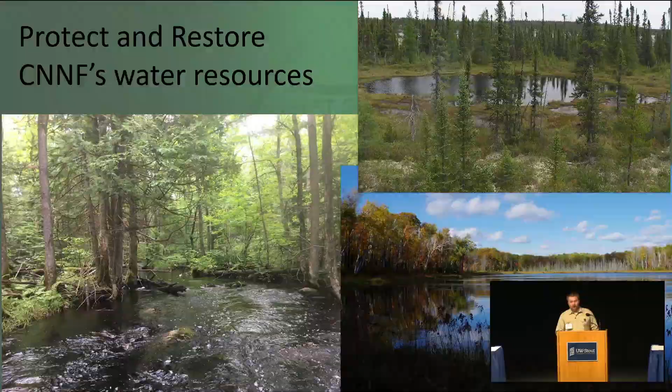But I always feel like I'm coming home when I come to the Red Cedar watershed. I grew up in Rice Lake, Wisconsin. I had a family cabin up here on Long Lake in the very headwaters up in Sawyer County. My first job was working for the Red Cedar Lake Association, pulling out curlyleaf pondweed, trying to keep Eurasian water milfoil out of there. Great job. And still to this day, any guesses where this fourth picture was taken based on the hue of the lake?

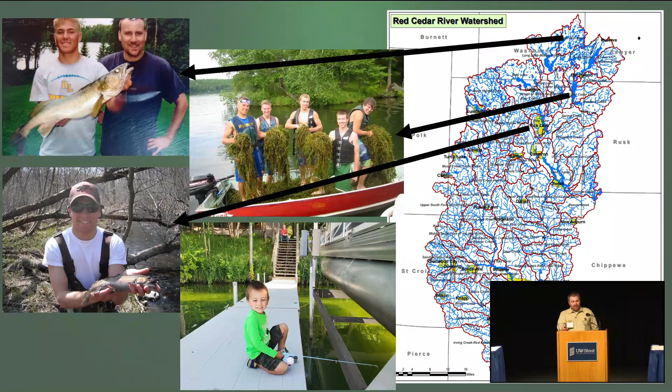One of my favorite lakes in the world, Tainter Lake. This is where my grandparents live. Have so many amazing memories going to visit them. They still live there to this day. That's actually my son on a picture that we took last summer off my grandpa's dock right in the northwest corner of Tainter Lake. So I love the Red Cedar watershed. Grew up here. My professional experience has taken me elsewhere, but I'm glad to come here and share some of my experiences.

So here's my outline for today. We're going to go over the role of forestry in phosphorus processes just a little bit. We're going to look at some of the ways that forest land management can impact water quality. And then really I'll be spending the majority of my time just really sharing some of our lessons learned on the National Forest and how we have reduced erosion and runoff over the past few years.

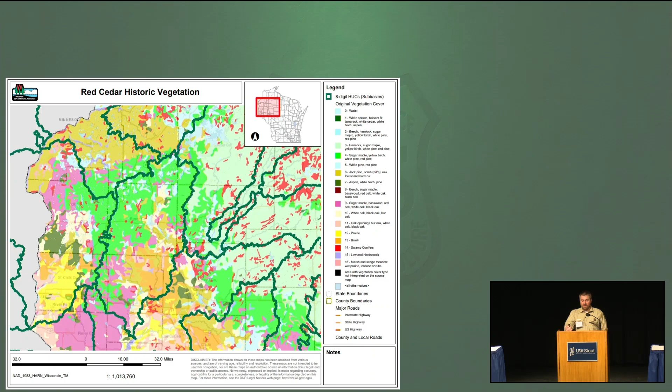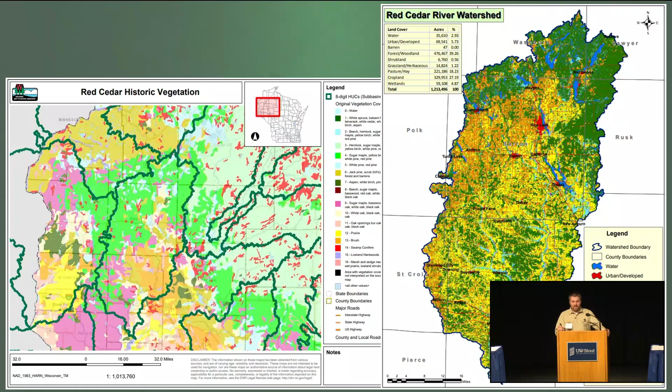So just a little bit on forestry and phosphorus. I was struck by looking at the historic vegetation of the Red Cedar watershed. They say about 75% of the watershed used to be forested. It's kind of those, on that map, the areas that are green and pink colored. And you compare that with today, and today about 40% of the watershed is forested, and the forests are kind of pushed up to the north and to the northeast in Rusk, Sawyer, and Washburn County up in the headwaters.

And just in case you're new to the Red Cedar watershed, our dominating water quality problem is an excess amount of phosphorus from our croplands and our pasture lands, but all other sources as well, that ultimately causes excessive algal blooms. This is a picture I took right from my grandparents' pontoon. I believe it was last summer on Lake Tainter.

They've done some incredible detailed study here in the Red Cedar watershed of where our phosphorus is coming from. They found about 66% of the phosphorus comes from cropland, yet cropland comprises only about 28% of the land area in the watershed. They've also determined that forest lands contribute about 10% of the watershed's phosphorus, but forest lands comprise 40% of the land area.

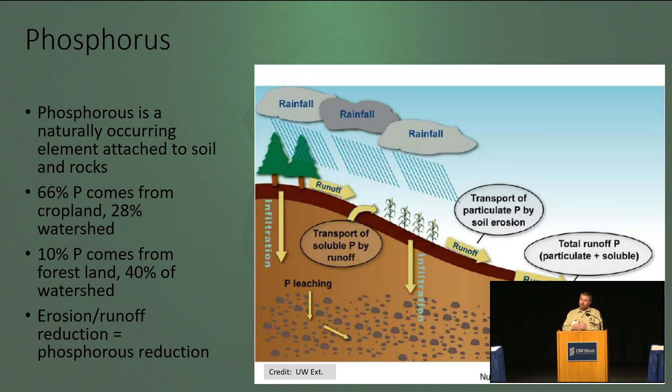The key with phosphorus, I think, is that it makes its processes fairly simple to understand. If we slow down erosion and runoff, we slow down input of phosphorus. It's really about that simple, though a lot harder to implement in a watershed as large and diverse as the Red Cedar. But at least the base processes we can understand.

As far as a tie to phosphorus, here's my take-home before we jump into forestry: all landowners in a watershed as big and diverse as the Red Cedar do have a part to play. Forestry can discharge sediments and phosphorus to waterways, so I think even us forest landowners have a part to play.

So what can forest landowners do about it? It's all about reducing erosion and runoff to lower phosphorus levels. I'd like to state this a little more positively, though. Forest landowners, not only in the Red Cedar but across the whole state of Wisconsin, have a tremendous opportunity to contribute clear, cool, naturally timed flows to the headwaters of our systems.

If you look at that map on the right, the darker green areas are our forests in Wisconsin, and the dark green lines are our major watershed boundaries. What do you see? Starting from the east: the Menominee Basin, the Fox River Basin, the Wisconsin River Basin, the Chippewa Basin where we are now, all the way to the St. Croix and the Namekagon, and up to the tributaries that flow into Lake Superior.

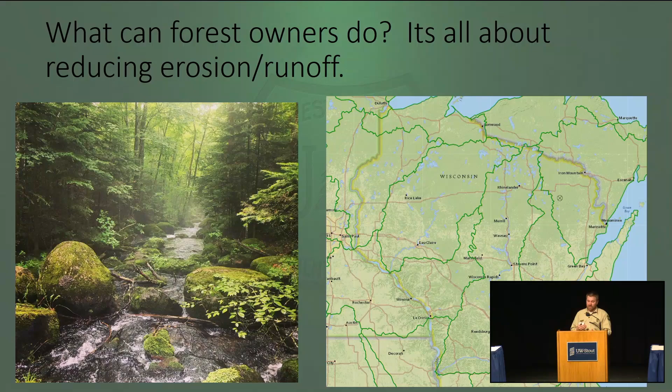All of our major watersheds in the state of Wisconsin originate in forest land. So forest lands are our headwaters, and I would say it's a tremendous opportunity that forest landowners have to steward this resource.

So how can forest land impact water quality? I have five main areas, and all of these I've observed on the National Forest. First and foremost, roads. By far the number one most impactful aspect of forest land management on water quality is roads. Unfortunately, forest management requires extensive road networks simply to facilitate moving logs and transporting them to mills. Research done by my agency across the nation has shown that roaded watersheds contribute anywhere between 3 and 700 times more sediment to surface waters than non-roaded watersheds.

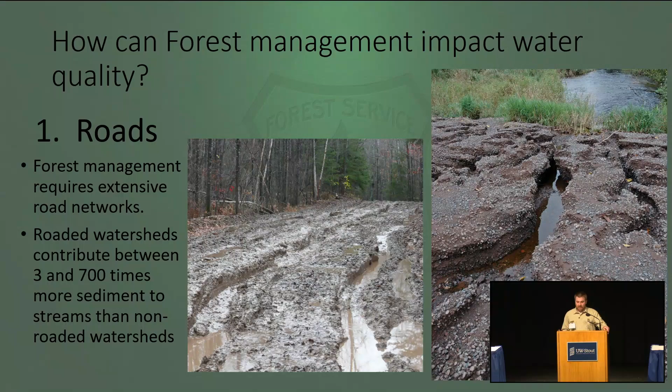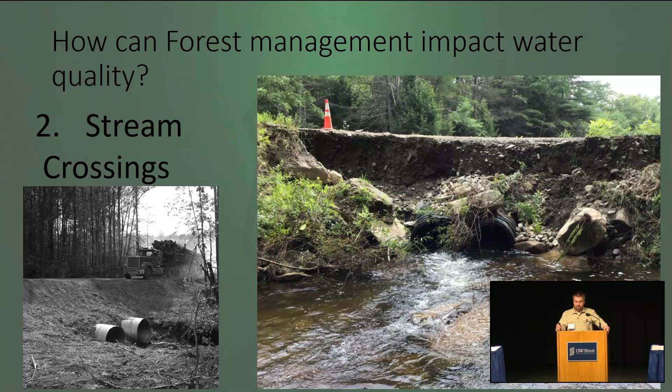That's simply—I'll show you the exact processes in a bit. Certainly all of our watersheds here in Wisconsin are roaded, and so are contributing naturally more sediment than they would have. Roads are especially impactful to water quality where they cross streams, simply due to proximity—the road is built right down in the stream. We'll be coming back to this topic in great detail in just a little bit.

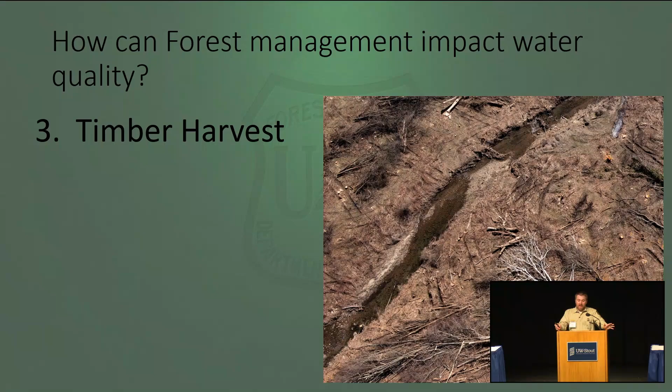Also, simply the act of harvesting trees close to water bodies can impact waterways. This is fairly logical, mainly in the form of reduction of shade and increase of surface water temperatures. Site preparation activities—this is what happens after areas are cut over and they're preparing the ground for replanting, forestry's version of tilling. This can also lead, if not done with significant buffers between these areas and water bodies, to short-term increases in runoff and erosion.

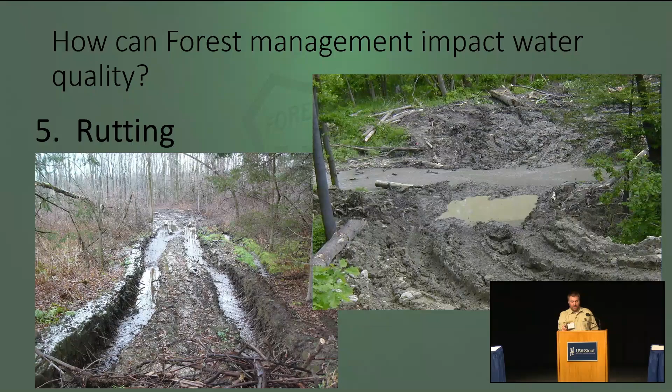And then simply the fact that we're driving large, heavy equipment on natural soils—rutting and compaction of native soils, if those soils aren't dry or frozen, can also put a lot of sediment into our waterways, especially like the picture on the right, if directly adjacent to a water body. And of course, it's worth saying that some of our biggest impactors to water quality in forested landscapes come from non-forestry related activities.

Certainly wetland modification, road building in wetlands, wetland draining, wetland filling, but also shoreline development, so we've got roads and new homes along shorelines. Dams—the state has a tremendous number of dams. Even on the National Forest, we have about 400 active dams.

And developed recreation, particularly motorized recreation trails—ATV trails, snowmobile trails. If they're not located, constructed, and maintained right, they can have tremendous impacts to water quality as well.

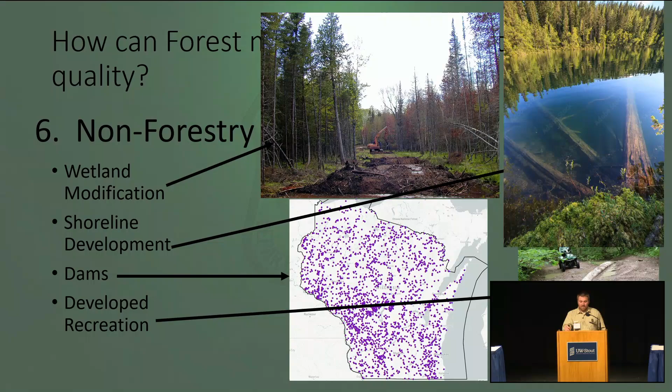Just a quick side note for anybody who owns property on shorelines: if you're clearing your shorelines, yanking trees out of the water, cutting them down before they can fall into the water, you're really robbing those lake ecosystems of vital habitat components. So if you're a shoreline owner, you have a tremendous opportunity to increase habitat value in the lake. Leave those trees in there and keep your shoreline as native as possible.

So now let's jump right into it, and this is the boots on the ground stuff. This is simply what we've learned in 30 years of watershed management on the Chequamegon-Nicolet National Forest. And we're going to start with our forestry best management practices for water quality.

Forestry best management practices for water quality—it's written in this wonderful little handbook. I have a pile of them up here on the front, and I hope I don't have to take any of those home, so please come up and grab one. It's a tremendous resource that's been developed for us in the state, developed by Wisconsin practitioners for Wisconsin practitioners.

But how did this come to be? This all started with the Clean Water Act of 1972, which among many things required that each state develop plans and procedures to control silviculturally—which just means forestry related—non-point sources of pollution to the extent feasible. So Wisconsin DNR, the Forestry Division, got together a great group of partners and experts, and they deliberated over many years and built the first edition in 1995 of Wisconsin Forestry Best Management Practices for Water Quality. It has one simple goal: to provide easy and cost-effective methods to responsibly manage forests and protect water quality. I think it does an excellent job of that.

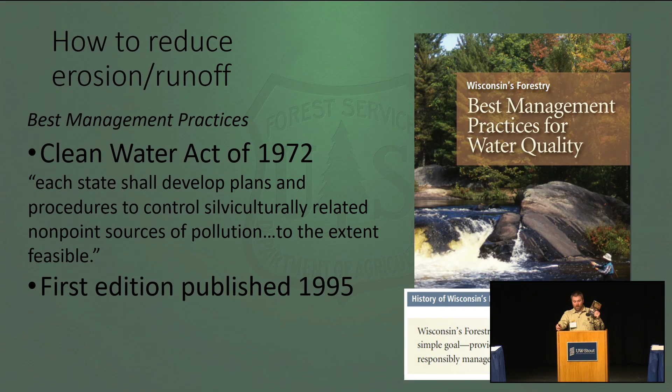I want to give you a brief overview of what's in this book and some of the lessons we've learned applying these things on the Chequamegon-Nicolet. It's a tremendous resource with many chapters, all worthwhile, but I'm going to focus mainly on 5 key chapters: timber sale planning, forest roads, stream crossings, timber harvesting, and riparian management zones, because they have the most actionable and practical BMPs that we need to know about.

Backing up a little, if anybody hasn't heard the term BMP before—Best Management Practice—this is simply the cutting edge on-the-ground techniques for either preventing an impact or improving something. So a best management practice, I'll just refer to them as a BMP.

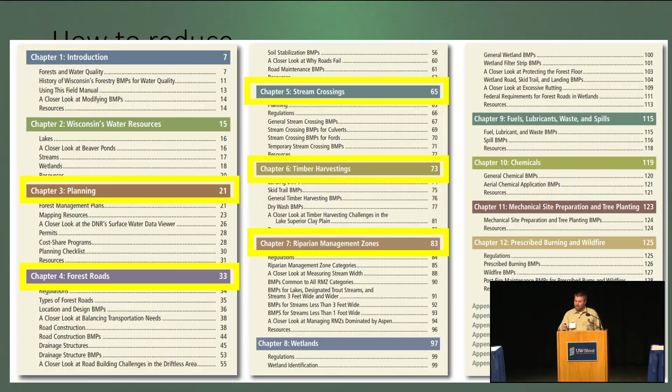All right, let's look at one slide on planning. This is chapter 3 in our book, and it's all about if we're going to be developing our land and logging our land, we simply need to have a logging plan. Here's an example of one that's been built by my forester colleagues on the Chequamegon-Nicolet. We do not put a timber sale out to bid without very thorough planning that has gone into that.

What we need to identify in our logging plans is our access routes, our water features—our wetlands, our streams, our dry washes, our lakes. We need to list all applicable BMPs and identify other sensitive areas, such as winter soils, which are just a heavier, wetter soil that needs to be operated on only in frozen conditions. There's lots of other logistical things that can go on a logging plan map, but those are the essentials.

So let's jump right into forest roads. This is the longest chapter in the book, and for good reason—we'll spend a decent bit of time here. The book says right at the outset, and I 100% agree, poorly located, constructed, and maintained forest roads are the largest contributor of non-point source pollution in forestry. Absolutely true. And notice the kind of pollution that roads contribute: sediment. And what comes with sediment? Phosphorus.

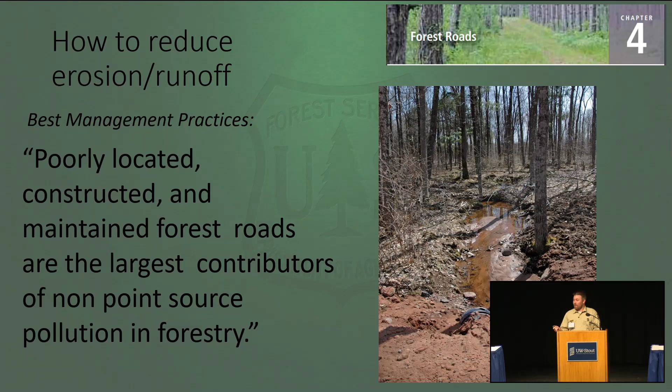The book first starts out with how do we locate roads, if we're in the fortunate opportunity to plan our properties from scratch, which we aren't always. Oftentimes we're stuck with the roads where they are. But if we can plan our properties and access routes, we want to minimize the water crossings.

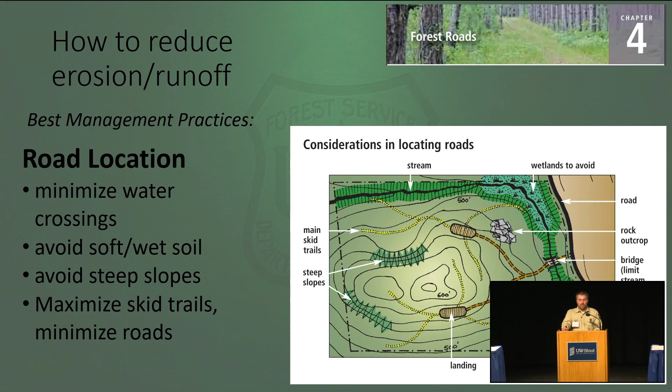We want to avoid wet soil and avoid steep slopes. One other key is we want to minimize the mileage of open, engineered, permanent, year-round haul roads, and maximize the mileage of what's called a skid trail. That's where big, low ground pressure tire equipment, logging machines, can traverse, as opposed to a large semi-log truck. So we want to maximize skid trails and minimize roads on our properties.

Next, we want to ensure that we use the appropriate type of road use designation for each type of road. This is also based on the level of engineering that's gone into the road, the surrounding soil conditions, and our needs for the property. I would say this is really key.

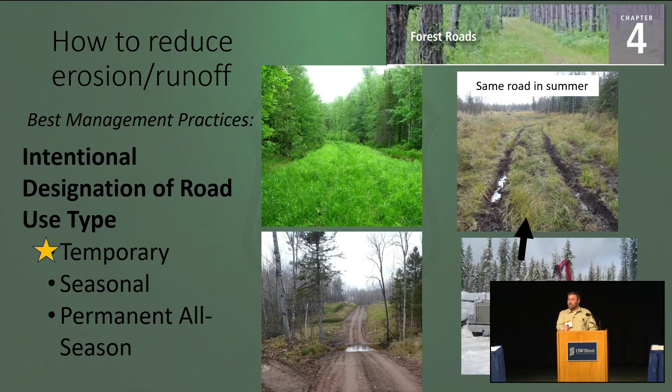One of the best ways we can reduce the amount of erosion and runoff from our properties is utilizing as many temporary roads as we possibly can. The vast majority of erosion and runoff on forest land comes from our open, permanent roads. Much less, as you can see from the top left photo, you'd expect on a temporary road that spends most of its time well vegetated. Also, temporary roads are cheaper to construct and maintain.

Now, in some areas with wetlands and other wetter, soft soils, the only way to access our lands for timber harvest activities is in frozen ground conditions. So it's really important that we designate our winter-only roads. The BMP here is that when we're done using them, we ensure we physically block them as best we can. This is mainly important for public landowners, because on public lands we have a variety of uses—hunters, ATVers—and we want to encourage those uses. But if we don't properly block our winter roads, these uses can cause tremendous damage.

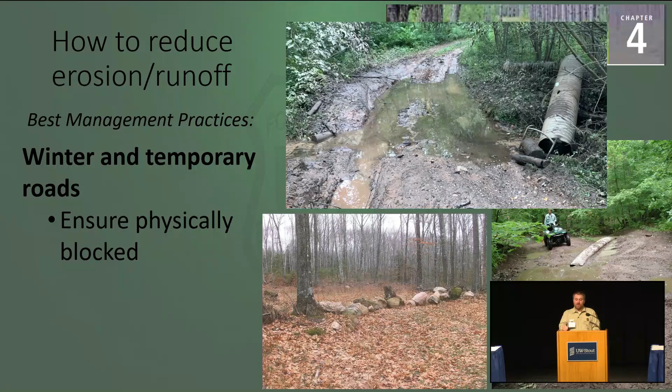Maintenance is also important for our roads, and really this comes down to making sure that whatever surface drainage template—crowned, insloped, outsloped—they were originally designed for gets maintained. You'd think that's pretty logical, but it's actually really hard to do, especially with big extensive road networks, like we have on the National Forest, where we need to maintain about 5,000 miles of open roads.

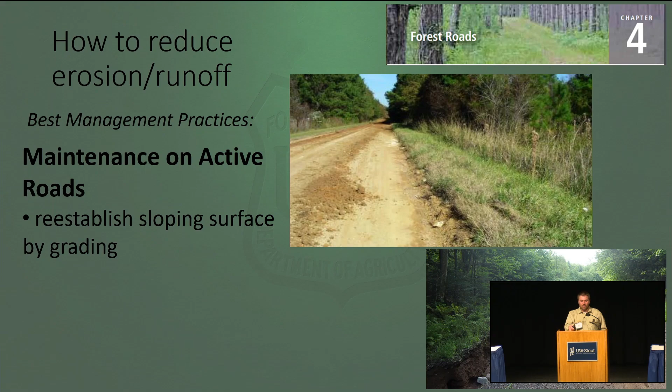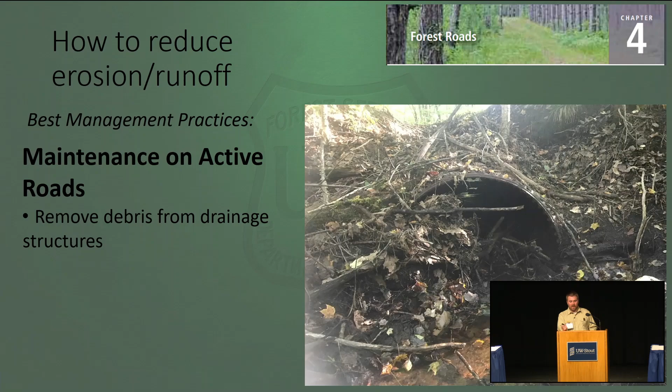Now, on our inactive roads, these are temporary roads and winter-only roads. Our maintenance is not recurring, like grading or unplugging drainage structures. It really happens only once, when we're done using the road and moving out of it to close it. So it's incredibly important that we remove our drainage structures, break ditch lines, and provide water bars, which are just big speed bumps on the surface to shed water off the road.

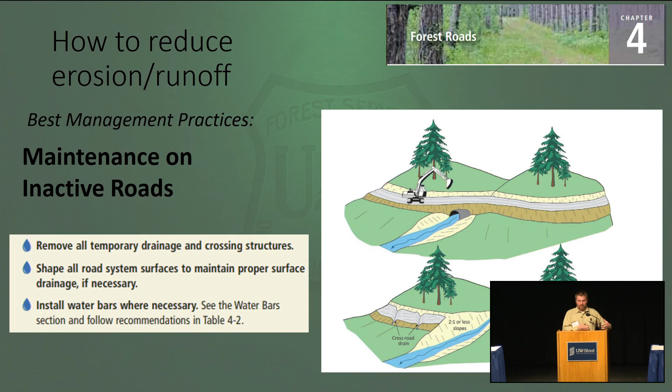And we break up the road surface and seed it. This is really important because if we're not going to be revisiting a road for a long time, those culverts will eventually plug and fail. This is probably our least attained BMP on the National Forest.

It just happened that in the past we were in a hurry to get out of a certain area. We were using a temporary road and left culverts in place. I probably have 400 pictures that look like this that I could share. We just did an inventory of all our culverts and stream crossings. This is a failed culvert that was left in a temporary road, and it discharged several hundred cubic yards of sediment into this little trout stream.

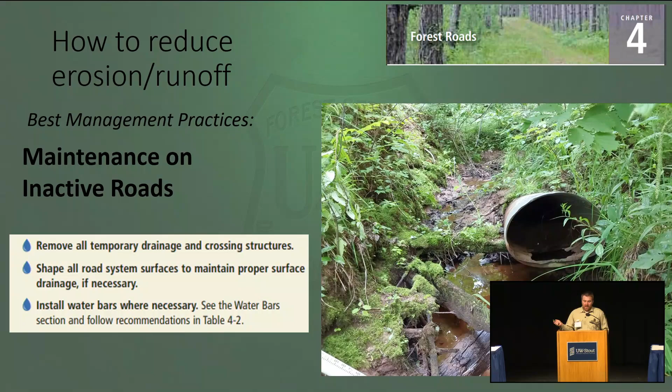So it's really important that we get in and remove culverts and stabilize these things before we leave an area. Here's another one. A big part of my job is going into these old temporary roads and properly removing culverts and drainage structures, properly decommissioning the road. That should have been done the first time. So that's chapter 4 on roads.

Moving on to chapter 5, I'm going to come back to stream crossings in great detail, since it's probably one of the main things I deal with in my job. But I want to highlight a few overarching best management practices about stream crossings that the book covers well. Overall, if you must cross a stream, look for a section that's straight, with a narrow channel, narrow floodplain, low banks, and firm approaches, and cross that stream at a right angle.

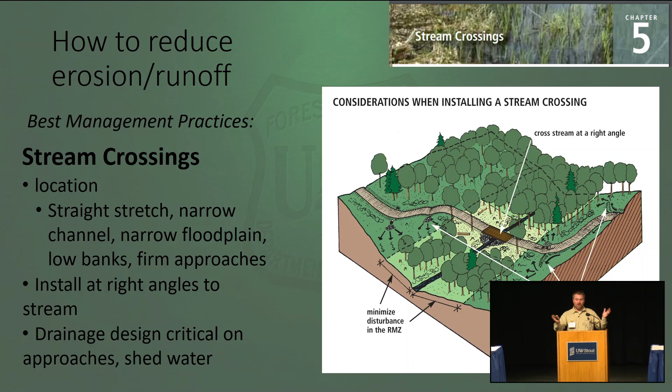We talk about road surface drainage design and getting water off roads as important, but it's even more important on the road approaches to a stream crossing. If we're not judicious about our road surface design and the road starts funneling runoff, it can funnel it right down directly into a stream. Because of the proximity of a stream crossing, it's really important that our road approaches are correctly designed to shed water. We want to get that runoff off the road, off the ditches, and into the woods before the stream crossing.

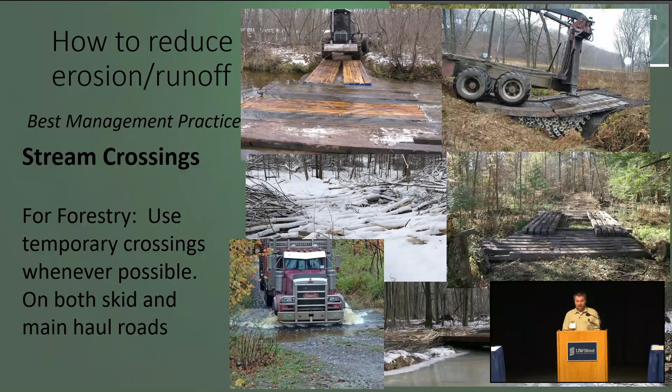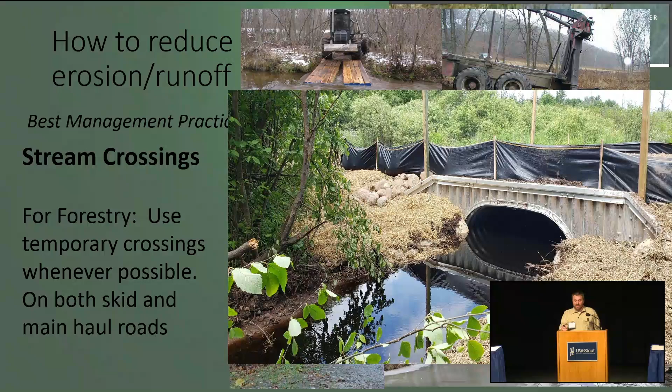So that's 4 timber mats placed, and logging equipment or even logging trucks, if designed a bit differently, can cross these. These are clear span bridges, and the materials for that crossing would cost about $2,000. If you elect to build an open permanent road, a properly designed culvert would cost about $100,000. So temporary crossings are not only cheaper and easier to maintain, they cost pennies on the dollar compared to a properly designed culvert.

The book has a tremendous chapter on timber harvesting, and for the sake of time I'll give you one example of a very important BMP. We need to make sure we're walking our logging units in snow-free conditions. I've seen many places where well-intentioned logging crews ended up laying out a unit, marking the trees, and overseeing implementation of a logging unit all in snow conditions, so they didn't see what was underneath the snow.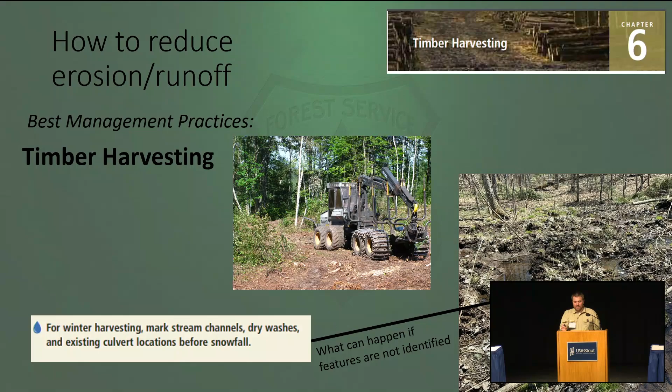The last chapter I'll cover is riparian management zones. These are your classic buffers, applied to streams and lakes. The purpose is to provide undisturbed buffers that filter sediment, provide shade to surface waters, and stabilize shores and banks. One misconception is that we want to prevent harvest in riparian management zones—that's not true. Some states do, but in Wisconsin we actually allow harvest in riparian management zones if certain BMPs are followed, which we'll look at now.

There are two main categories of riparian management zones: lakes, trout streams, or any other stream greater than 3 feet wide get the most protective type, which is 100 feet from either side of the ordinary high water mark. Small streams under 3 feet wide just get a 35-foot wide riparian management zone.

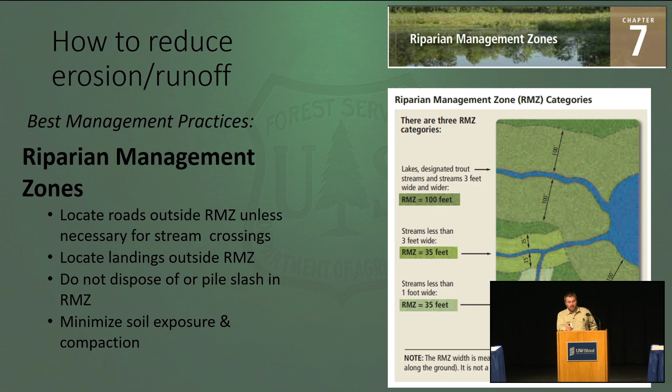Here are the BMPs if we want to operate equipment or harvest trees within riparian management zones. We want to locate roads and log landings outside of them, except where we need to cross a stream. We don't want to pile slash inside riparian management zones, and we want to minimize soil exposure and compaction there, being extra judicious about other BMPs. The rest relate more to the prescription of which trees we cut and which we don't.

We want to promote our long-lived species—hardwoods and pines—because this provides habitat, shade, and large woody debris, which is a really important input to our streams and lakes. So I want to promote those species and not cut them. I'll skip the second point.

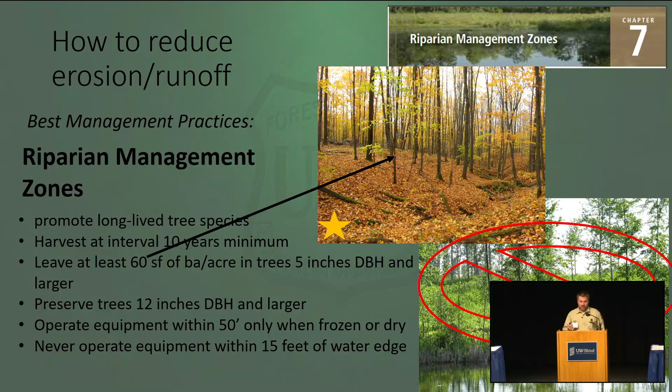We also want to preserve our biggest trees—12-inch diameter is a benchmark. We want to operate equipment in riparian management zones within 50 feet of the water edge only when the ground is frozen or dry, and we never want to operate equipment within 15 feet of the water edge. So that's the list of BMPs for operating in riparian management zones.

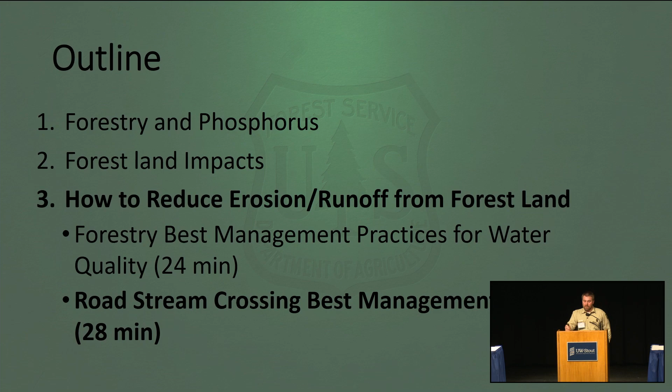Moving on, we'll now focus on road stream crossing BMPs. But I strongly encourage you—there's a lot more in this book than I was able to cover. I cherry-picked what I thought were some of the most important best management practices, but I've got about 15 books left up there. If you have any interest, please come grab one.

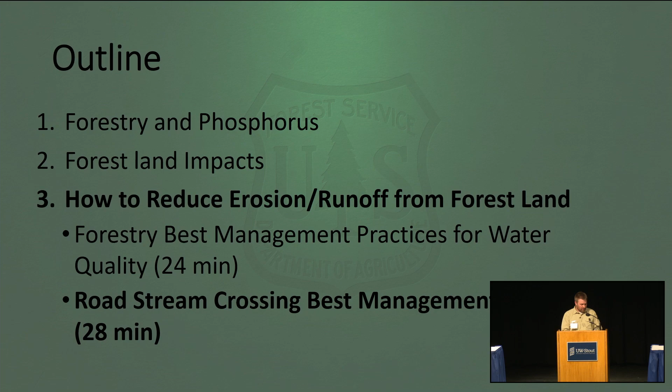So remember from just a few minutes ago, I talked about how the main BMP for stream crossings is we avoid them, we avoid permanent stream crossings. But if you have to build a permanent stream crossing, really the rest of my presentation is going to cover detailed BMPs about how we do it right.

I'd like to broaden the scope out a little bit further than just forestry and forest land applications. I'm going to share the key steps to ecologically friendly road stream crossings, whether they're on an interstate or a trail in your backyard. This is really what I primarily work on professionally on the forest, because we have a tremendous amount of roads, and up in the north woods of Wisconsin, our road and stream crossings, believe it or not, are the number one greatest source of impact to our watersheds. I'll share more on that later.

So what's the problem with road stream crossings in the state? Well, part of it is the sheer number. Wisconsin's a place where it's easy to build roads. We have a tremendous network of public roads, and therefore a tremendous number of places where roads cross streams. The best figures are that we have about 80,000 road stream crossings in the state on public roads alone. Private roads, the estimates are fuzzier, something like 40,000. So we might have 120,000 places where a stream crosses a road in Wisconsin.

The other problem isn't just the sheer quantity of road stream crossings, it's that our predecessors designed culverts originally without a whole lot of forethought. The goal they had was simply to minimize cost. At best, culverts were designed hydraulically, meaning you do a calculation to figure out as small a pipe as you can get away with to push a certain amount of clear water through. That was the best case scenario historically. Oftentimes it was, well, a 24-inch culvert worked here for a few years, let's put another 24-inch culvert in and call it good. The problem we're seeing is that across our entire landscape, our culverts are ubiquitously undersized. They fail in floods, therefore they require frequent maintenance, and there's a tremendous amount of ecological impact from an undersized culvert.

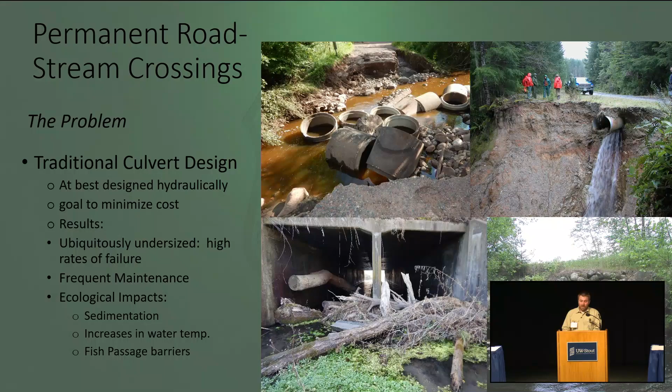Let me explain that. This is something I think is quite a bit under the radar in the Wisconsin conservation community. It's a topic I don't hear much about. I'm kind of the only crazy guy talking about culverts most of the time at most conferences I go to. But this is a huge issue across the state, so I'm glad to open up the box a little bit here and explain it.

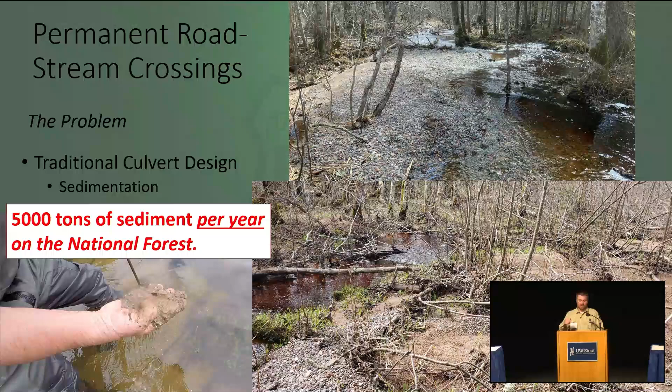So why are traditionally designed culverts an ecological problem? There's really two reasons, and a third I'll attach as well. First of all, it's sedimentation. Traditionally designed culverts erode, either chronically or catastrophically all at once. On the National Forest alone, we've estimated that 5,000 tons of sediment per year are dumped into National Forest streams from road stream crossings.

The other problem is traditionally designed culverts are very often barriers to fish passage, and there's lots of different ways they can become barriers. They can be jump barriers, depth barriers, or velocity barriers. The data we have in Wisconsin, with about 7,000 stream crossings assessed so far across the state, is saying that right around 50% of our crossings today are barriers to fish.

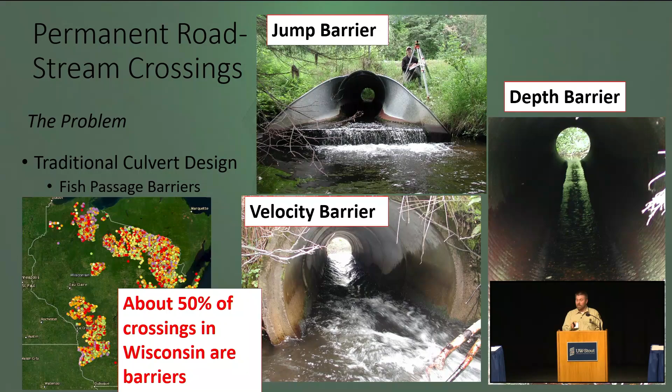This isn't as much a direct ecological problem, but it's a huge issue for community disaster preparedness. Traditionally designed culverts simply weren't designed to handle the types of floods we're getting these days with climate change, because again, at best they were designed hydraulically. The biggest failure of traditionally designed culverts is they didn't account for debris that moves down our stream channels in floods. It's not just clear water that passes through our streams in floods.

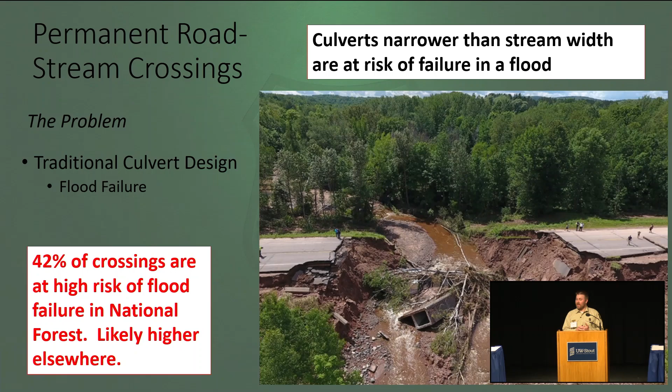So when I look at road stream crossings, I think they're a water quality issue, a fishery issue, and also a community disaster preparedness issue. Fortunately, if we design a culvert right the first time, we can have a flood resilient, fish passable, low impact crossing. And that's what I'm going to be sharing with you for the rest of the time.

And so I guess I just want to pause. You might wonder why this Forest Service guy is standing up here pretending he's an authority on roads. Well, this may be a surprise to a lot of you. It certainly was to me.

The Forest Service manages more roads than any other state or national agency in the nation. We have 154 national forests. We're the number one public land manager as far as the size of the land, and it's something like 530,000 miles of roads managed by the U.S. Forest Service. To put that number into perspective, the grand total mileage of our interstate system across the whole nation is 47,000 miles. So the Forest Service manages over 10 times more roads than all of the interstates combined. It's a lot of roads.

Up until the 1990s, some of the younger folks in my agency refer to it as the bad old days, when the Forest Service just kind of slapped in roads and didn't properly design structures, didn't do proper maintenance or construction. That all changed in the 1990s. There was some well-deserved litigation on my agency, and Congress ultimately passed new legislation that mandated the Forest Service clean up their act. And we did. Now I'm standing here with some great success stories, some great lessons learned from the past 30 years of trying to do it right.

So here's what we've learned. When it comes to managing road stream crossings, there's really two steps to the solution. We've got to inventory our road stream crossings, we just need to know what's out there and what condition they're in. And then when we get to replacing them or installing a new one, we need to understand the correct design principles.

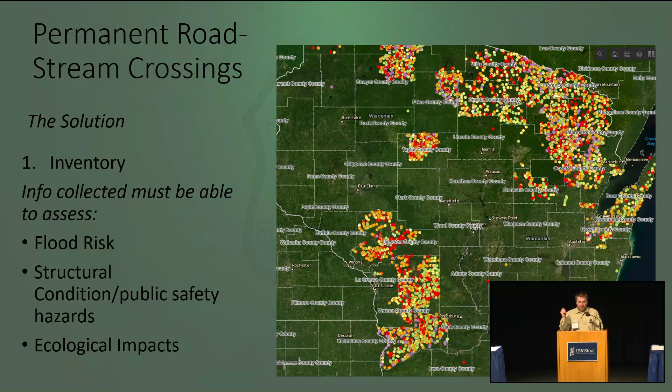Several dozen partners are using it, a lot of land and water conservation staff, DNR, Fish and Wildlife Service, Trout Unlimited. It's picking up great steam, so I hope to see more coverage here in northwest Wisconsin in the future. I'll also say I'm a trainer statewide for this protocol, so if anyone wants to learn how to collect this data, or even get a quick tutorial, please send me an email.

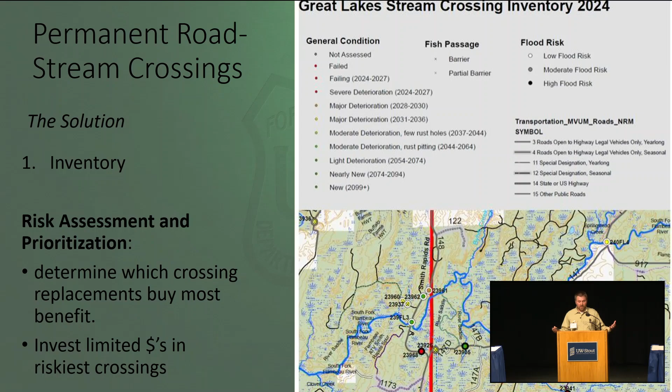So of course, what we want to do ultimately, the ultimate goal of collecting inventory data, is we need to use that data to conduct risk assessments and prioritize which crossings we're replacing. We all have limited budgets, so we want to be investing our limited dollars into the riskiest crossings for replacement. It's a big part of my job on the forest.

And of course, once we've inventoried and prioritized our crossings, this is really the nitty-gritty, we need to know how to properly design them. The design methods of the past have failed, and it's been well documented. We have 120,000 case studies in failed traditional culvert design across the state. So here's how we do it right.

I give trainings on stream crossing design across the state, and what I always stress is when we have the opportunity to design a stream crossing, this is really our one chance to do it right. If we do it right, we can have a crossing out there that has low ecological impact, can pass floods, will be low maintenance, and we won't have to think about it for 75 to 100 years.

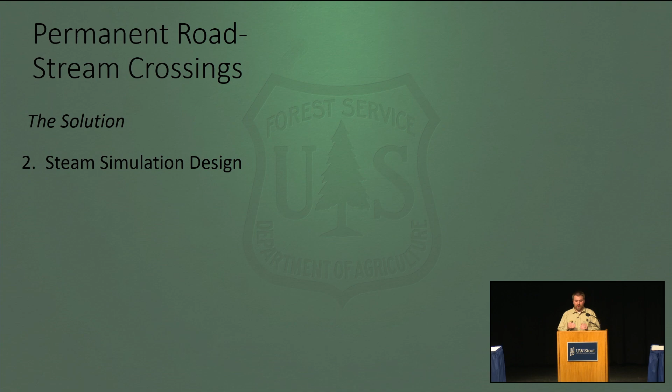On the flip side, if we go with what we've always done and slap in a culvert because it worked for a few years, we're going to be out there every single spring plugging holes in the road and pulling stuff from the inlet, and we'll probably have to replace that structure in 10 to 20 years. So we need to take a long-term perspective and do a good job when we have the opportunity to design a stream crossing.

The Forest Service's stream crossing design method, which isn't just ours anymore—it's been adopted all over the country, and we're pushing pretty hard in the state right now—is called stream simulation. I think this is probably the best thing my agency has ever produced. It was originally a protocol designed to provide fish passage at road stream crossings, but now we're pushing it for all these other reasons, for the longevity and flood resilience that come with this design method. So what is stream simulation?

It's a design method that incorporates stream geomorphology into the design of a road stream crossing. We believe that if you take care of the stream, you're going to take care of the road. The overriding principle of stream simulation—I like the word because that's what it is, we're copying a stream within a culvert. Another catchphrase is: you build a stream and put a lid over it, which connotes that we're always using bottomless structures—not most of the time true here in Wisconsin, but a pretty good analogy.

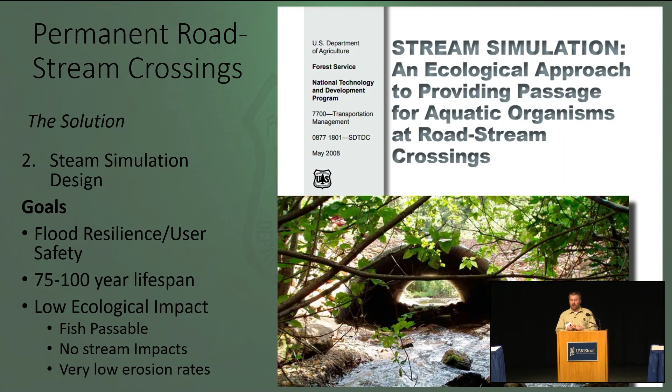So what are the goals of stream simulation? Every time we design a crossing, we want to make sure it's going to pass big floods, provide safety to the users of the road, have a 75 to 100-year lifespan, and have low ecological impact. It's going to pass fish, not impact the stream, and have very low erosion rates. Here are the key design essentials of stream simulation design.

First, we want to ensure our culverts equal or exceed stream bankfull width—this is number one, and it buys two things for us. If our culverts are equal to or greater than stream width, they'll be able to pass the large woody debris moving downstream in floods. Second, it ensures the cross-sectional geometry of the channel within the culvert—the flow velocity, the flow depth inside the culvert—is an exact mirror of the natural stream. That helps fish pass primarily, and maintains continuity of the stream through the structure.

The other overriding design essential is we always want a naturally deposited stream bed within our culvert, so the critters have the natural stream material on the bottom of the culvert. I'll explain a few benefits to that in a bit.

I just want to quickly walk you through the design steps. I'll go quick, but give you a flavor of what this takes—it takes a little bit of work, but it's not rocket science whatsoever. All we're doing is copying a stream.

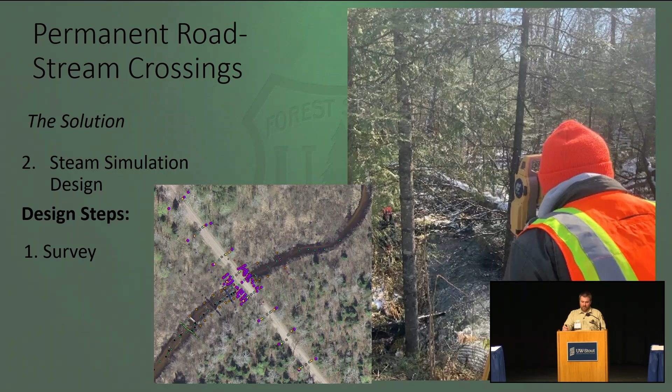It starts with a pretty accurate topographic survey. We collect points of stream, floodplain, existing road, and existing culvert. This is extremely key: when we're out for the topographic survey, we identify a natural section of the stream not impacted by the existing culvert. Notice here on the left, upstream of that road, it's all ponded—that's a very common scenario, as undersized culverts back water up.

So we're often going downstream. This is called our reference reach, and we simply use this as our template—we're trying to build that reference reach inside of our culvert.

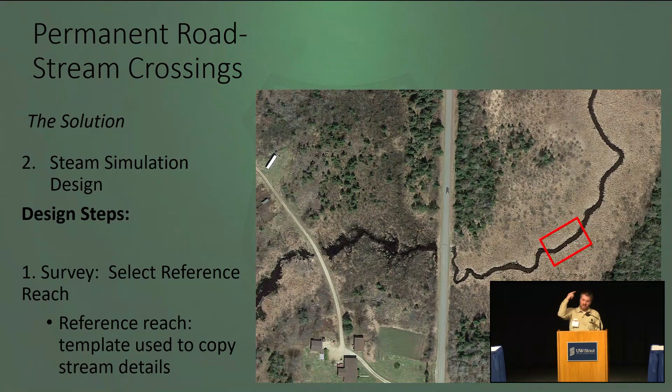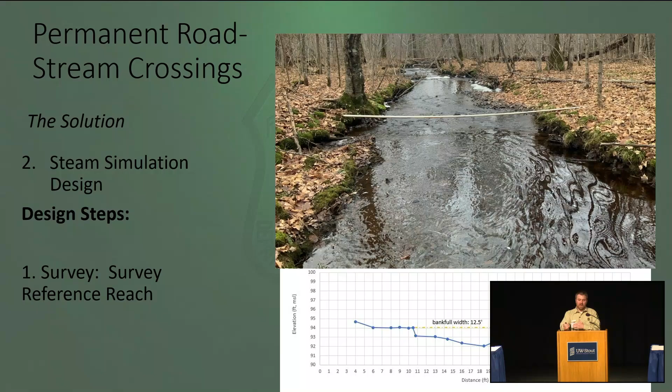In the reference reach, we're taking special care. We're doing detailed topographic survey measurements, particularly cross sections, which is just a string of elevation points taken perpendicular to the stream channel and crossing it up onto the floodplains on both sides.

We're also taking careful measurements to characterize the makeup of the stream channel bed. This is called a pebble count, which is just about as simple as it sounds. We're picking up stream particle materials, measuring them, and getting enough to have a statistically significant sample.

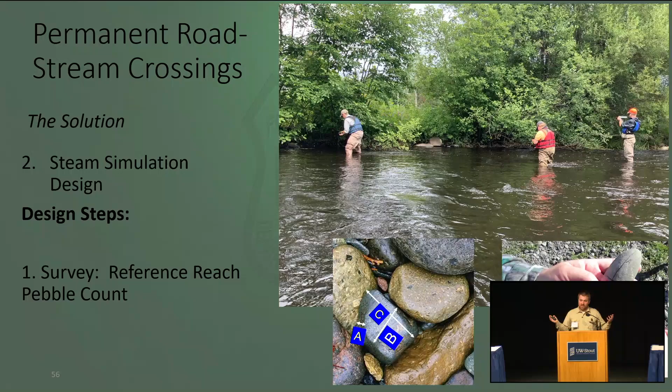Once we take all that data back into the office, the next steps happen there. First, it's really important that we align the stream with the culvert inlet on the upstream side. If we don't do this—and this is another thing our predecessors did to save cost—they put in the shortest culvert they could, which was always perpendicular to the road.

I'm sure you've seen this. A stream will run along the road for a while and then take a 90-degree turn into the culvert. It works for water, but it doesn't work for large woody debris. So we found it's a major failure mechanism. If a culvert's not aligned to the stream, wood catches as it's moving in and it blows the crossing out.

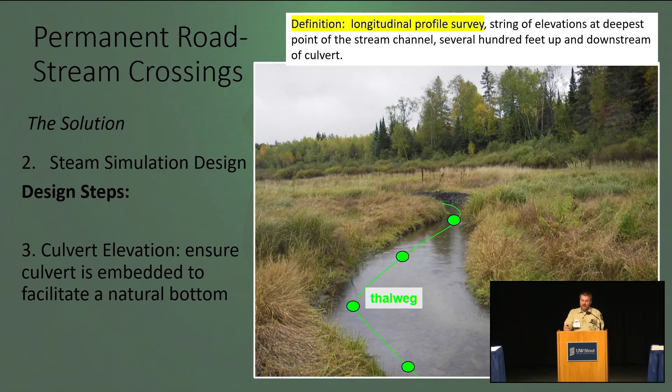Second, we're determining where we're setting our culvert elevation. This is done through data taken in the topographic survey. I won't belabor this too much—it's called a longitudinal profile. So we're plotting up the elevation of our stream bottom.

Just to orient you to this figure, this is a cross-section looking in a parallel orientation to the stream. The bottom line is a string of elevation points for the stream bottom. The blue line is the water surface, and the brown line is our road. So we're plotting up this data, and we figure out where the stream bed wants to set up within our crossing.

Here it's represented by this yellow line. We call this our design thalweg. All we're doing to make sure our culvert is embedded is setting that culvert one to two feet below that design thalweg, as represented here. Again, if we do that, the stream moves in a bunch of sand and fills in our culvert for us.

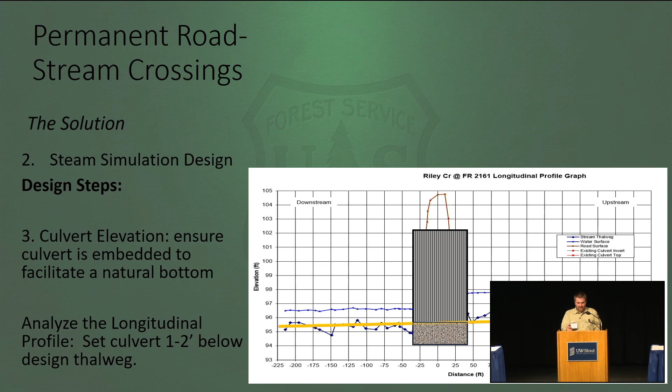Pretty simple, actually. So let me take a couple steps back. Why is culvert embedment—this is called culvert embedment when you have material inside the culvert—why is that important? Two reasons. Number one is fish passage.

Studies have shown that certain species of fish are averse to swimming over bare metal. They want to be swimming over natural stream substrate. It's called a behavioral barrier. But also we have a whole lot more than fish moving up and down our river corridors—all the invertebrates, mussels, aquatic bugs—they need stream bed material to physically move up and down stream channels.

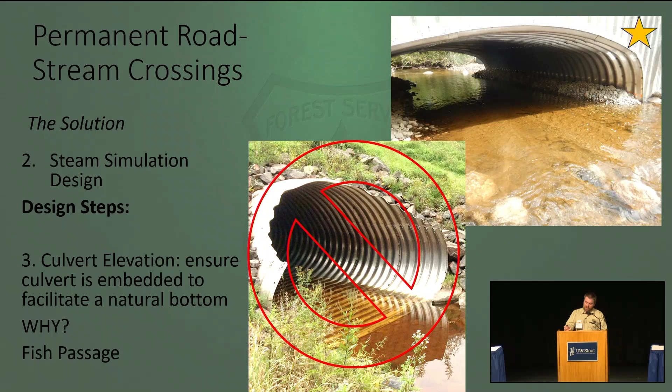So first of all, it's for fish passage. Second, and this is how we sell it to townships and counties, it extends the lifespan of our culverts significantly. We found on the National Forest that culverts not embedded, after only 20 years, can still start to look like that bottom photo and can be completely rusted through.

This is because streams move gravel and sand, and that acts as sandpaper as it moves down culverts, accelerating corrosion and abrasion rates. It's clear, I hope, why that stream simulation culvert on the top is abrasion resistant—the bottom of that culvert is 3 feet down below rocks.

Next, we're determining how wide to design our culvert. It's really easy with stream simulation—we're not doing complicated calculations like they teach you in civil engineering school. Again, we're matching the stream. We're building a stream.

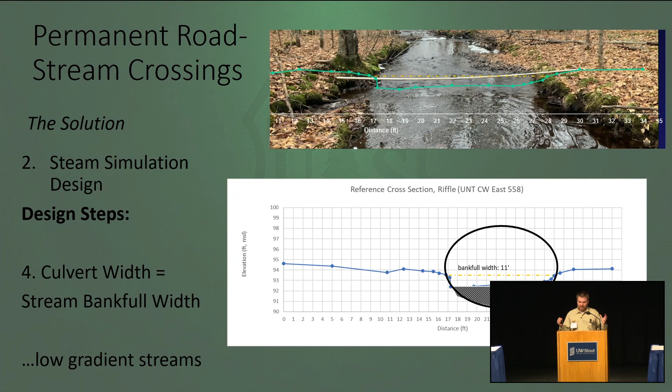So if this is my reference reach cross section and my bankfull width is 11 feet, my stream is 11 feet wide, I'm simply designing an 11-foot wide culvert. Again, you can see it's set down below the stream bottom because it's going to fill in. Do you see here how this is simulating the stream? The same exact channel cross-sectional geometry in the culvert is what we're seeing in the reference reach.

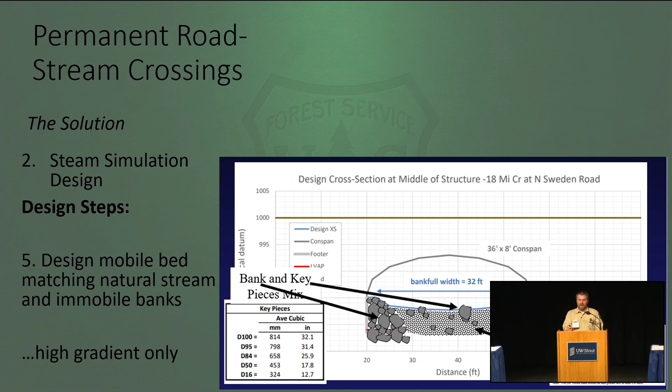If we're designing a bed and banks through our structure, we just make sure that culvert is a little bit wider than bankfull width to provide room for banks inside the structure. We only put banks inside a structure. Here's a few examples of culverts with banks. This is needed for high gradient streams, real steep streams—it's the only way to make sure you provide fish passage.

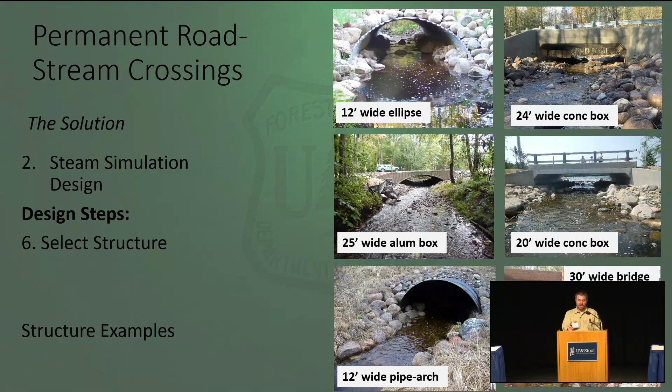Only about 5 or 10% of our streams in north central Wisconsin are steep enough that we need to design bed and banks within them. Then we simply select our structure, and typically for any given site, lots of different structures will fit. But that's mainly what the engineers do, picking the ideal structure for the road constraints.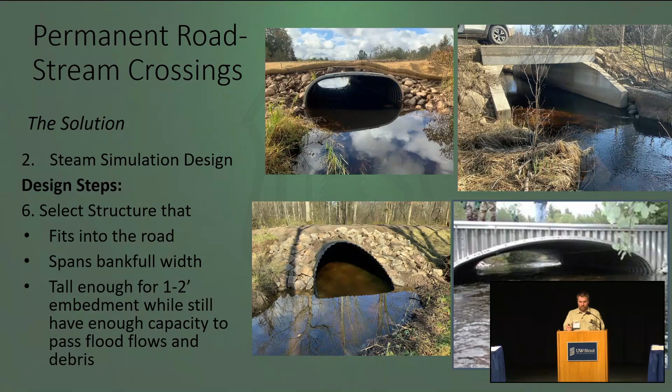The last thing I do is check that our structure is going to pass big floods. I won't go into great detail, but our standard in the Forest Service, which I'd recommend any road management agency adopt, is that the 100-year flood passes through our culvert with sufficient extra space to pass debris. We want to make sure we're passing big floods.

On our larger, more complex crossings, what we do at the very end is pass all these initial design details to an engineer who draws them all up nicely in a plans and specs document.

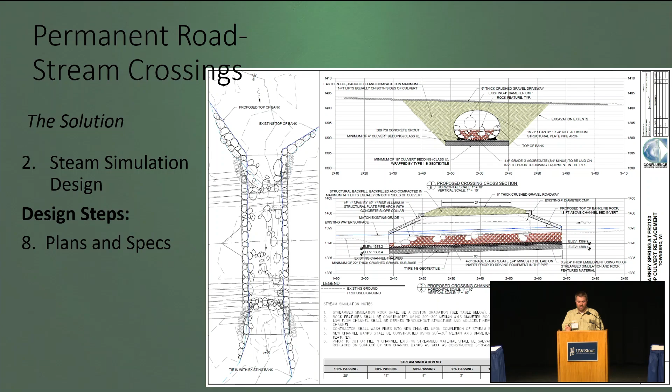I just want to drive home the point that a stream simulation design culvert is a restoration technique. This is probably my favorite part of the job, seeing how the stream restores itself when a properly sized culvert is put in.

This was an undersized, traditionally designed culvert in about a 12-foot trout stream, Simpson Creek, and it backed up about a 50-acre pond. Look at the left aerial photo, taken when the existing culvert was there—a large pond. This is very common in our flat streams of northern Wisconsin. A culvert set just 1 foot high, simply because of our gradient, can pond water back for thousands of feet, essentially acting as a dam.

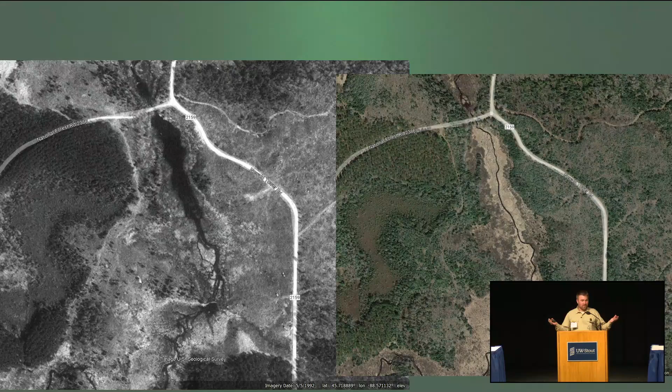After the properly designed stream simulation culvert was installed, the pond went away instantly, and you can see how quickly that stream system restored itself. By the way, this is a class 1 trout stream—water temperature went down 6 degrees Celsius after we installed this culvert. We call this watershed restoration at stream crossings.

This might be simple, but just to drive home that these crossings pass big floods—has anybody heard of the Chequamegon flood of 2016? This was up in Ashland and Bayfield County. An enormous flood, several times the 500-year flood—something like the 100,000-year flood, which is kind of a whack. We don't even refer to it in recurrence interval language because it was so big. It was about 4 times the 500-year flood.

Before the flood, we had replaced 17 crossings using stream simulation, so it became a great test case to see if this really works. And it turns out it really does—16 of the 17 stream simulation design culverts survived that flood. Here's one, taken just a few days after the flood. You could only tell a flood went over there by the bent down grass. To me, that's success. Traditionally designed culverts—90% of them failed.

Actually, at that time, if you lived over in the UP and wanted to get to Duluth, you couldn't drive through Ashland and Bayfield County. You had to come up on the National Forest because we had the only roads open, thanks to stream simulation design—every other crossing just about failed. All the state highways, county highways, they all failed. We all learned a big lesson from that flood about culvert design, and let me tell you, they're doing things a little different now up there.

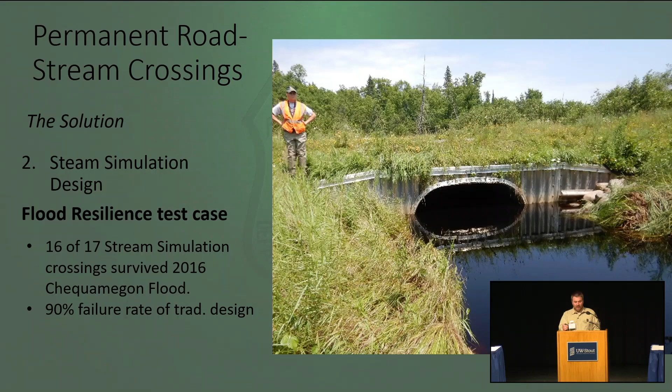I just want to end with some best management practices on construction of stream crossings. First, when installing a large culvert, we want to make sure we have a dry hole. This is accomplished by blocking off the stream and bypass pumping it—it's called a cofferdam. There are lots of different effective cofferdams: bladder bags, sandbags, and sheet pile.

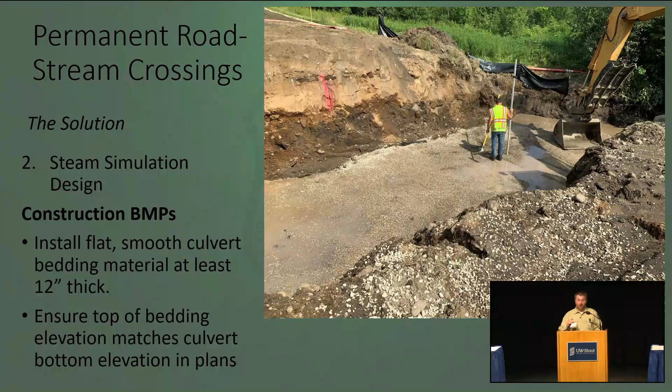We also want to make sure we're maintaining stream flow for all the critters downstream of the site. And we want to install a flat, smooth culvert bed made of granular material at least 12 inches thick. What the foreman here is doing is checking the elevation of the top of that culvert bed, which is the same elevation as the bottom of the culvert—that's the all-important elevation that ensures we have an embedded culvert.

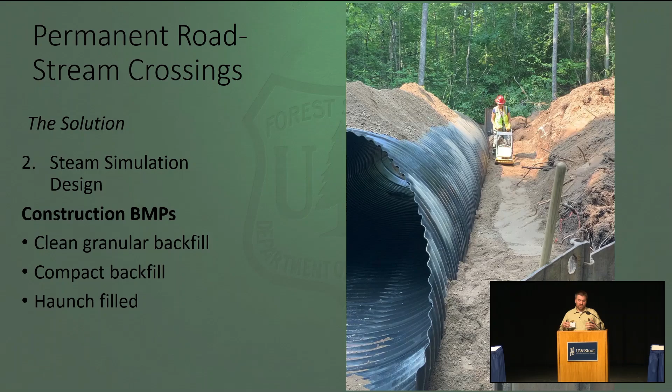When we're backfilling the culvert, we want to make sure that we're compacting that material in 12-inch lifts. If we don't compact, channels actually form along the side of the culvert, and it can cause subsurface erosion and premature failure.

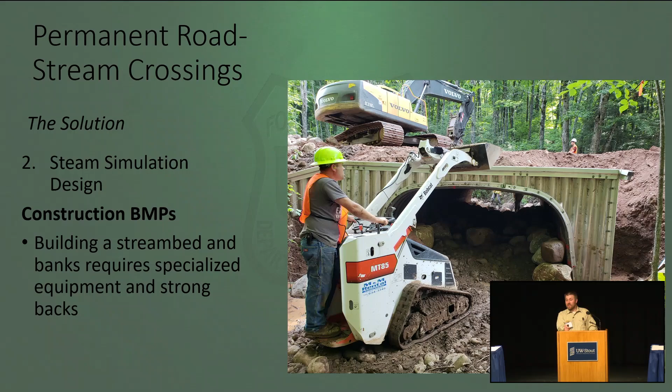If we're building a stream bed inside of our structure, this requires specialized equipment like this walk-behind skid steer and a lot of strong backs, because we're actually placing a lot of those rocks by hand once the equipment brings them in.

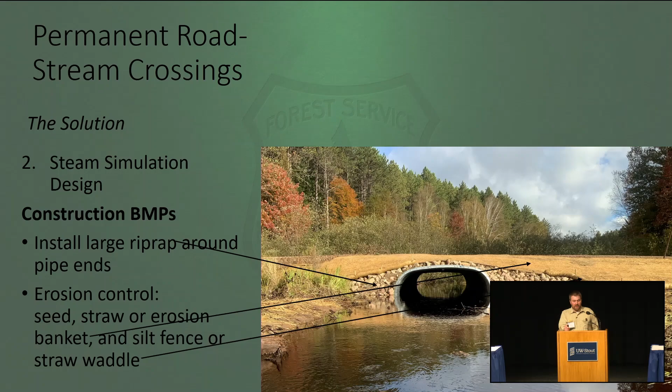Before we leave a site, we want to make sure we have all the right erosion control structures. Long-term erosion control is large riprap around the pipe ends. Short-term erosion control is seed, straw, blanket, silt fence, and straw wattle that holds the road slope in place until vegetation establishes.

And this is what I want to leave you with: road stream crossing management is complex. It requires people with expertise. So what I'd encourage you all, if you have a crossing you need to pay attention to, is to do it right the first time. It's going to pay off.

We sell this to towns and counties by explaining that a properly designed culvert saves a lot of money in the long term, because you're not out there unplugging it every year, you're not patching up the road, you're not replacing it every 20 years. It has a 75 to 100-year lifespan. Over the life cycle of that structure, you're going to save a whole lot of money. And that's not even considering the ecological risks and gains of doing it right or not.

So if you're a private landowner, there are lots of places you can go for help with stream crossings. Primarily, John Sipple, he's the district conservationist for NRCS, a tremendous resource. They can provide technical assistance, funding through their EQIP program, and there's County Land and Water Conservation staff too.

I'm not sure if Tyler Gritzmacher is here. He's the Barron County one, a great repository of information. He can help connect you to partners.

DNR, if you're a private forest landowner, your number one best contact is going to be the DNR's forest hydrologist, kind of a counterpart to my position. His name's Nolan Kriegel. He's out of Spooner, but he covers the whole state. He'll come out to your site, give you advice, and help you technically. And then, of course, in DNR as well are the water management specialists.

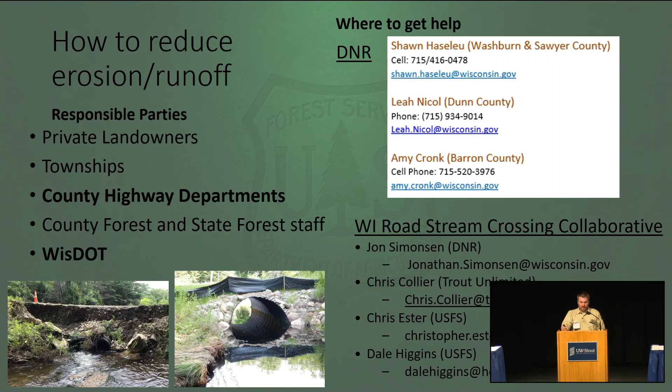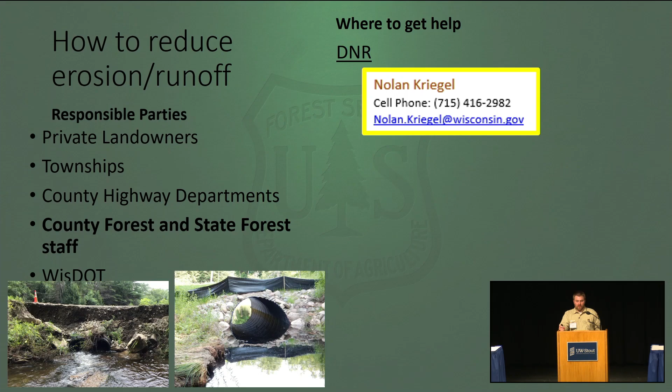If you need help on a large complex crossing, certainly starting with the DNR transportation liaisons are important, but I would also invite you to reach out to my group. We call ourselves the Wisconsin Road Stream Crossing Collaborative. We provide training and resources, cost share, statewide. If anyone's interested in a more detailed stream crossing design training, I can come down here to Barron County or Dunn County and do it. A bunch of different partners from the Forest Service, Trout Unlimited, DNR are involved in that Road Stream Crossing Collaborative, along with county forest and state forest staff. I believe we have a decent bit of county forests in the watershed in Washburn and Sawyer County. Just like the National Forest, county forests and state forests have tremendous road networks and manage a tremendous number of forest roads. If there's anyone here involved in those county and state forest areas and road management, Nolan Kriegel from the DNR is going to be your best contact. So here's my contact information. Feel free to jot down my phone number and email, and I'll leave up some of these contacts here, and I'll take any questions.